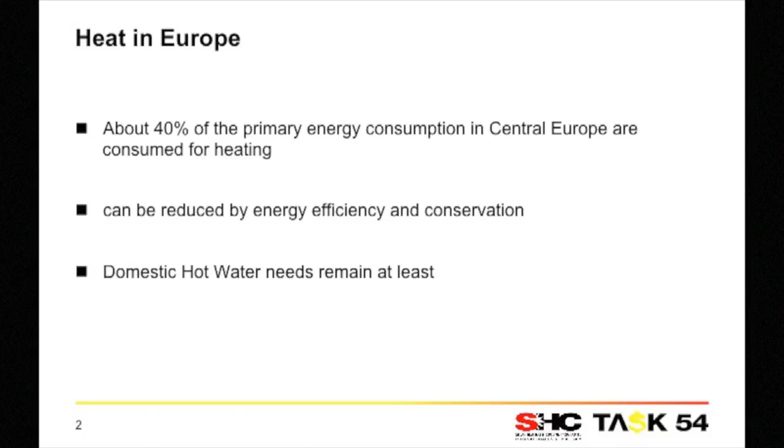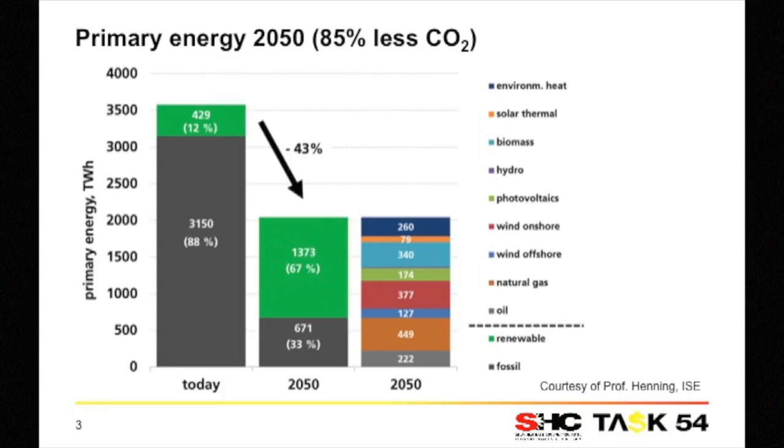So what's going on in future? We had already a lot of insight in political border conditions in the next decades. A lot of scenarios are focusing on 2050 now because it's such a nice number, and it's also targeting 85% less CO2 emission. As you can see here, we will cover then a majority, about 2/3 maybe, with renewable energy sources, and only some smaller part of fossil fuel remains. And one part of this renewable energy is low temperature solar thermal, here on the second place. So it's still a lot to be a good business, and therefore we try to check how to reach this target of this reduction in 2050 and also this market share for solar thermal.

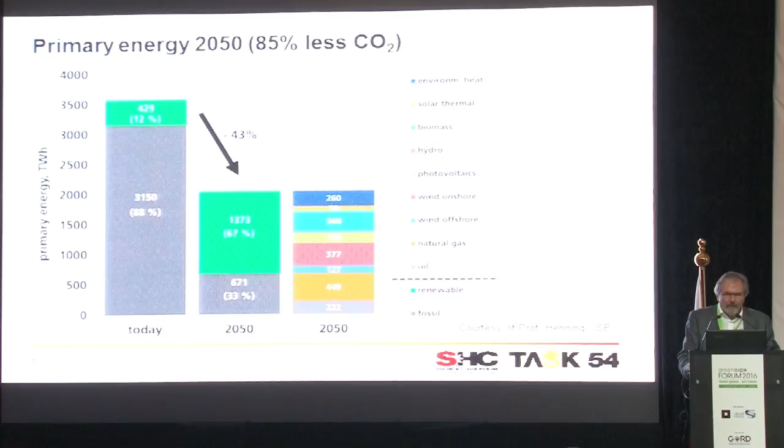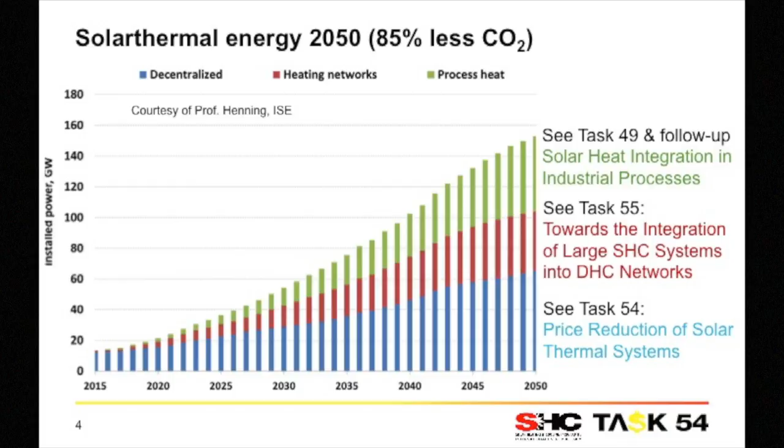If we look a little bit more in detail about the solar thermal scenarios, you can see here one part is dedicated to solar heat integration in industrial processes, which is also a big subject in the Solar Heating and Cooling program, namely Task 49 and the upcoming new one. Then we have the large solar heating and cooling systems in the district heating networks. There's Task 55 going on, dealing with this very important issue. And the rest is the decentralized low temperature solar thermal supply, which needs to be looked at more in detail. It will be part of a renewable energy mix in future. So you can see here all the nice toys: wind energy, PV, combined heat and power, and solar thermal, and all have to work together.

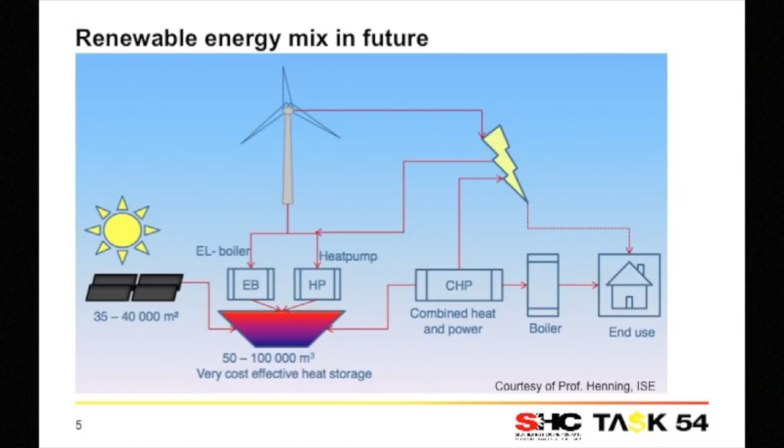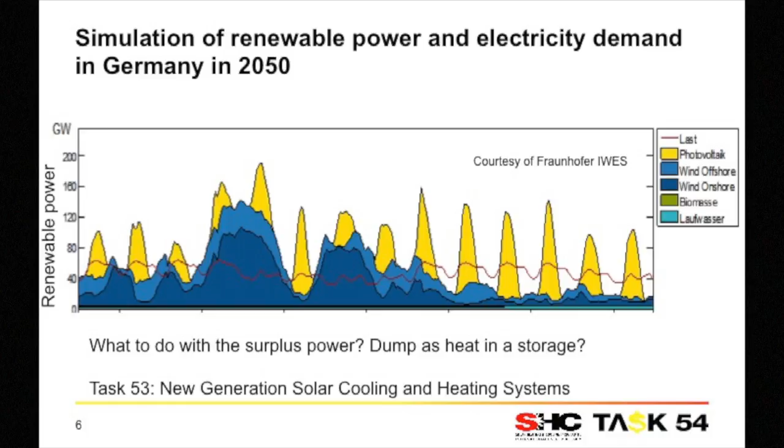So what to do with this surplus energy? Usually people say, okay, let's use it for heating. Let's dump it into our water heat store. And that's something which is also addressed by an IEA task. But for us in the solar thermal branch, it causes, of course, some problems, because what happens when this surplus energy would be sufficient for heating? Then we have a bad market share. But this simulation was from summertime, and during winter time in Europe we have problems with solar energy in both cases.

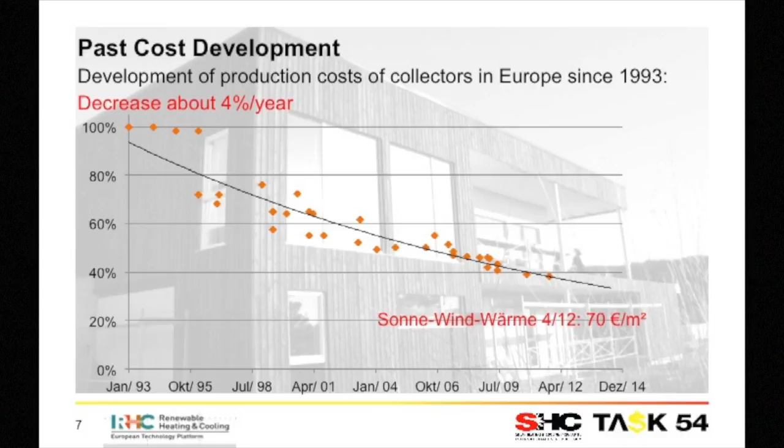So finally, it's a question of the costs. Here I've drawn the cost development in the past until 2012 for solar collectors in Europe. You can see a typical learning curve, a decrease which goes down to about 70 euros per square meter, more or less a decrease of 4% per year. It's not very exciting, but steady. And how does it continue?

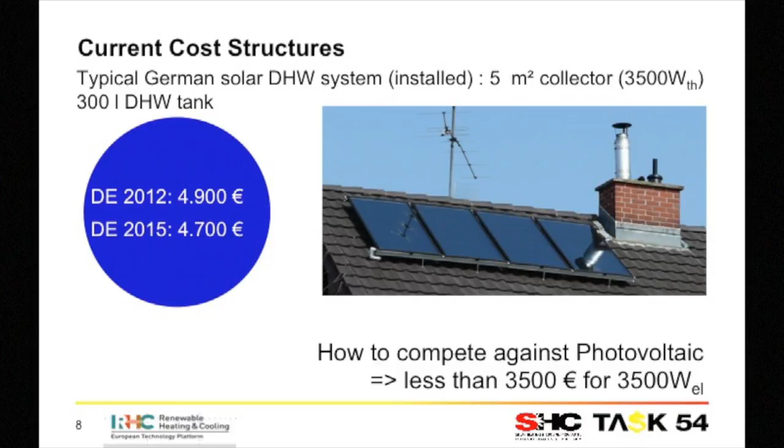Let's consider a typical Central European domestic hot water system, about 5 square meters collector area and a 300-liter water tank as a buffer. In 2012, you had to pay about 5,000 euros for the whole system. In 2015, 3 years later, you still have to pay nearly the same price, in spite of some progress in R&D and production efficiency. That's a little bit strange, and this number is much too high. If you want to compete against photovoltaic systems delivering the same amount of energy, but as electricity, then you have to be clearly cheaper than 3,500 euros. Otherwise, it would not be feasible to install a solar thermal system instead of a PV system for heating purposes.

And that's more or less the solution. If we consider what are the real costs for the hardware, that means for production and materials and designing all that stuff, we come to less than 50% of the end user price, and the rest is consumed by installation. So the installation of a solar thermal system is not so straightforward as for a PV system. And the sales structures in Europe are not so optimized for selling it cheaply, installing it cheaply, because this is the money which is then used from the installer for surviving.

And maybe they need it, because the systems are not very installer friendly. So they spend a lot of time and want to be paid for that. If you look at the combi-system, that means a system which is also used for heating purposes, they are usually a little bit larger in area. Here, these numbers are based on 11 square meters. That's an even bigger system as an example. Then you can see that finally the shares for the different cost contributions are pretty similar. So the production cost itself are about 40%, and all the other ones are not really acceptable.

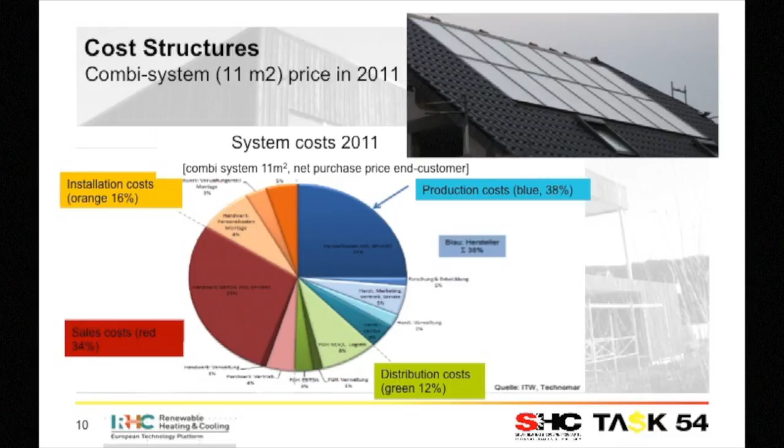So that's why we started with Task 54, price reduction of solar thermal systems. And we want to go for a target of 40% reduction along the whole value chain in order to be competitive against PV. And our ways to do it are simplified component design, simplified system design, standardized subcomponents. Not every company has their own ones. Innovative cost-efficient materials and low production costs, easy to install systems, reduced maintenance and operation costs, and improved marketing measures.

You can see it sounds a little bit different compared to the usual R&D program, where you want to increase the efficiency, you want to improve the production, and here the main goal is to get to something which maybe suffers a little bit in efficiency, but allows cheap installation, because the installation is more than 50% of the end user price, and that has to be cut.

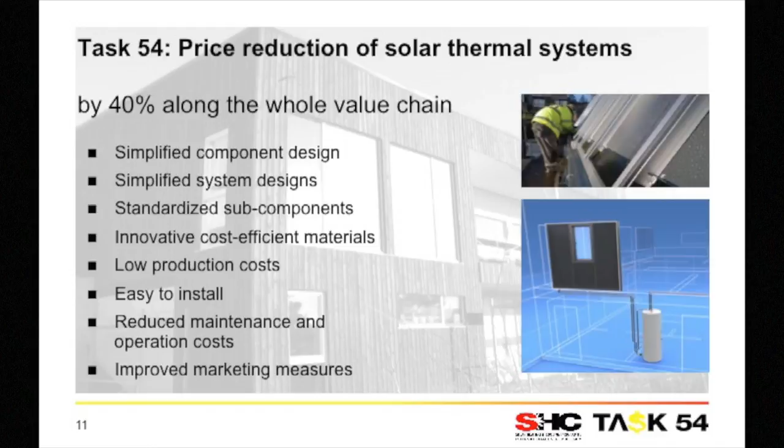So within this Task 54, we have a certain substructure. I want to show it to you in order to see what kind of topics we are addressing. So market success factors and cost analysis is one part which need to be done to be more efficient in work. System design, installation, operation, maintenance, that's all the cost reduction potential. And the same with cost-efficient materials, production processes and components. And the important thing is also to talk to the manufacturers, to talk to the installers, to convince them that it's also for them, because of continuous market share, a big issue to support us, to come with us to solutions for the future.

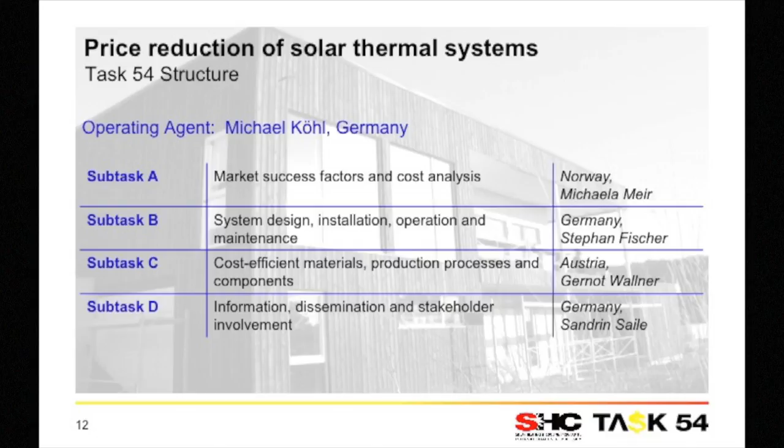So for the beginning, and we are more or less in the beginning phase after 1 year still, we have to define some typical systems, depending of course on the country where it is used, which then serves as a benchmark for further improvement. We have to prove that what we want to do is working. And that's one way. The second brick in this wall is a cost tool definition. So at the end of the day, we have to compare the levelized cost of heat coming out of the system and compare it with the state of the art, with our optimized system, and with PV, of course.

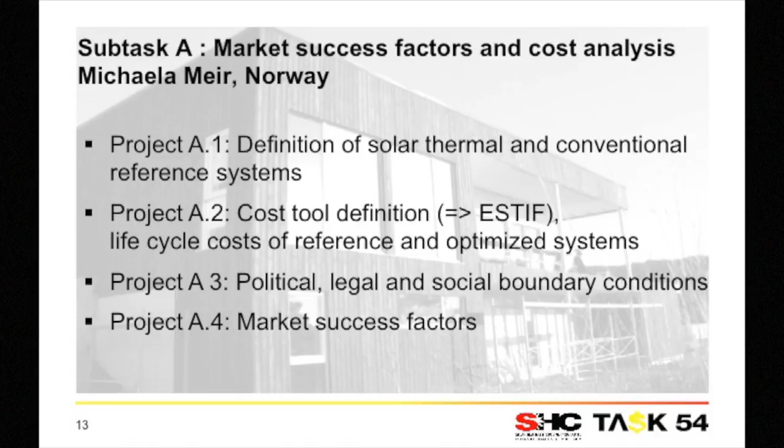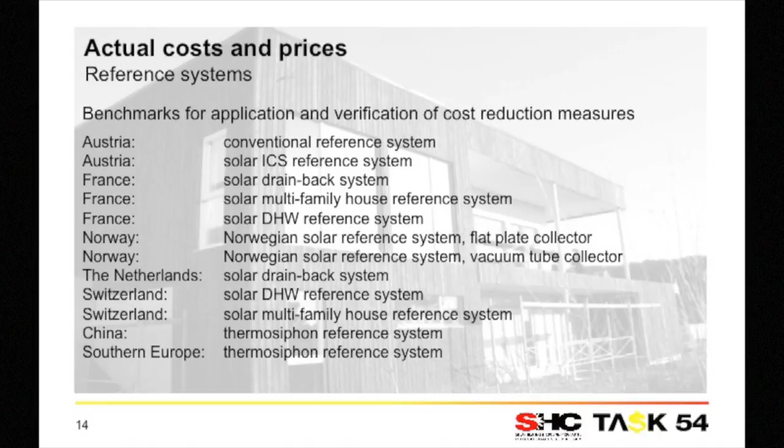And then we want to have a look on the political, legal, and social boundary conditions, which maybe could be a help in changing a little bit for facilitating more solar thermal systems in Europe. And we want to learn from market success factors in order to promote solar thermal more. So that's Subtask A. In B, and here's a list of different systems we want to consider as the benchmark, so you shouldn't read it yet.

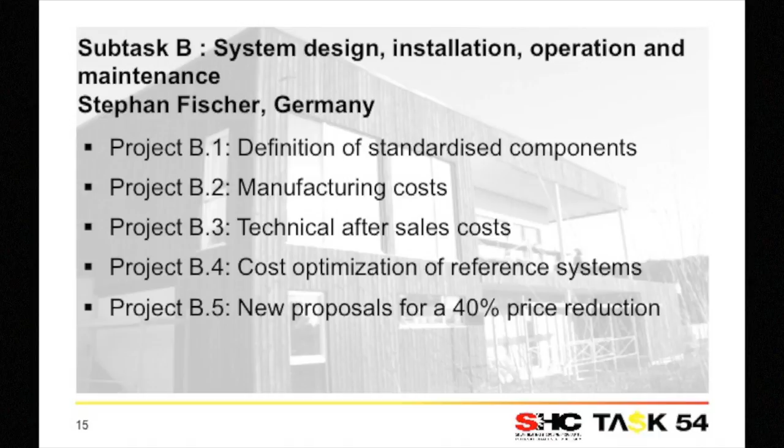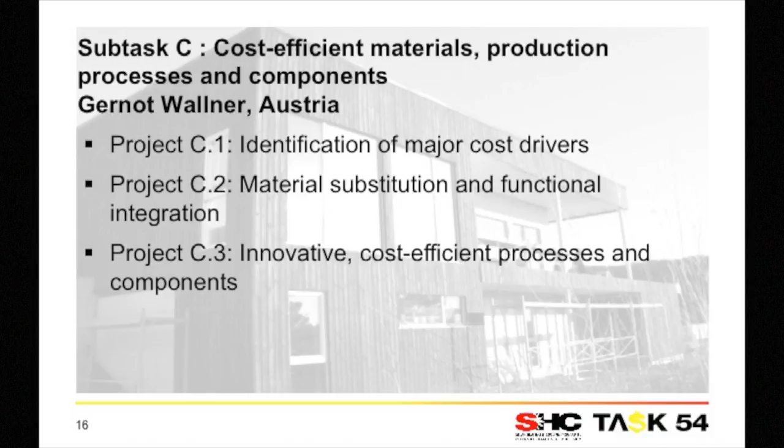And in B, we are more looking for the technical optimization, to find standardized components, to look for the actual manufacturing costs and the after-sale costs, and optimize these reference systems I just showed in order to come to this 40% price reduction. Subtask C focuses on cost-efficient materials, production processes, and components. And here, for example, we want to continue partly our work from Task 39, polymeric materials for solar thermal applications. This is a direct conversion of oil into future energy in this case, and could help for mass-produced parts to come down in the costs.

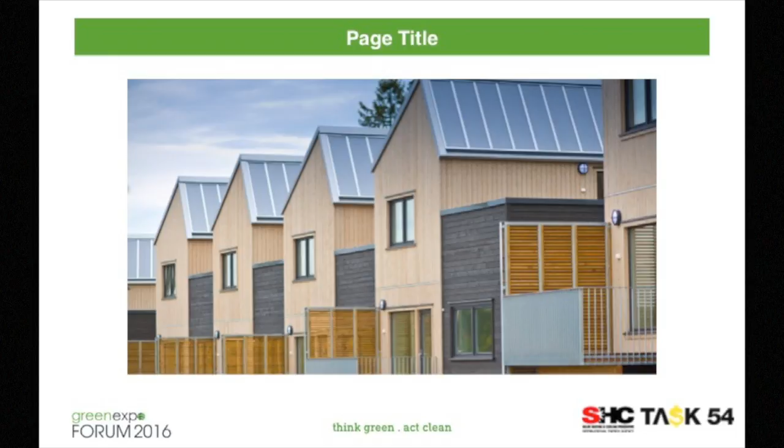So finally, I want to show you one example where these row houses are completely equipped at this south-oriented roof side with polymeric collectors as a good example how you can do it in a nice way, in an efficient way, and you could do it even in Norway.